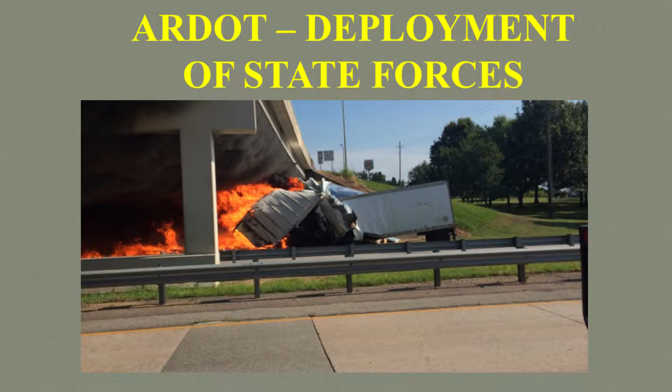Andy's going to be talking about how we use our maintenance forces in Arkansas. This is our deployment of state forces. I thought I'd start with some exciting slides. We got this bridge back open and everything done in 14 days.

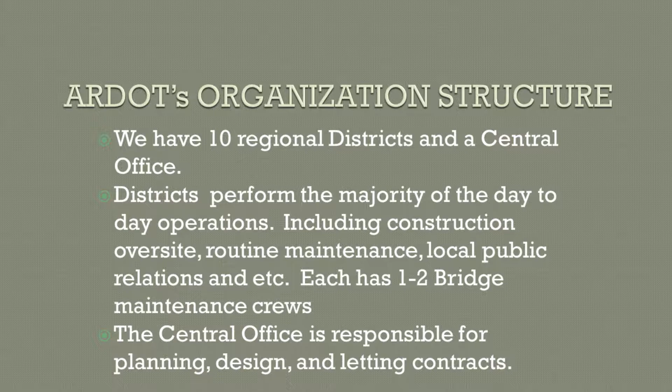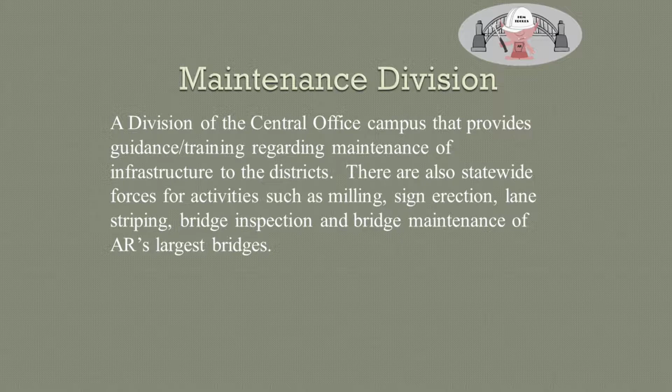I'm Andy Nanneman, a senior engineer with Heavy Bridge Maintenance. AR DOT is organized with 10 regional districts and a central office. The districts basically perform everyday maintenance and routine public relations, and the central office is responsible for planning, design, and letting of contracts. The maintenance division sets the precedence for what we need to do for maintenance as a state. Heavy Bridge Maintenance is a section of maintenance division.

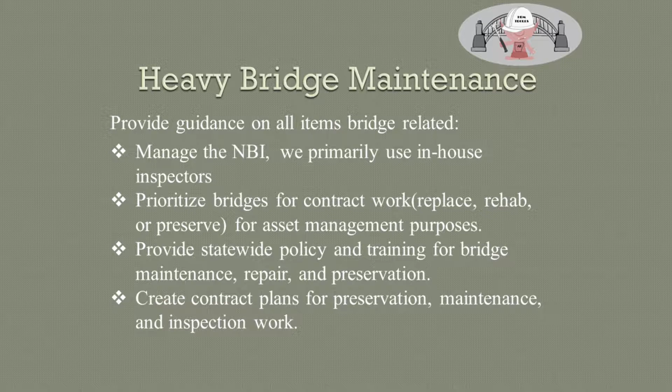We manage NBI primarily with in-house inspectors, and prioritize bridges for contract work, which Mike has a good presentation on Thursday. We provide statewide policy and training for bridge maintenance, repair, and preservation, and create contract plans for preservation, maintenance, and inspection work. We also have operational duties.

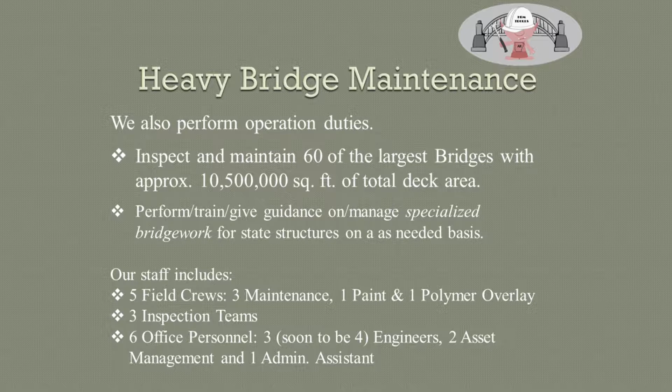We inspect and maintain 60 of the largest bridges in the state, approximately 10.5 million square feet of deck area. We perform and give guidance and manage specialized bridge work. Our staff includes 5 field crews, 3 of them general maintenance, 1 paint, and 1 polymer overlay, plus 3 inspection teams and 6 office personnel, including 3 engineers.

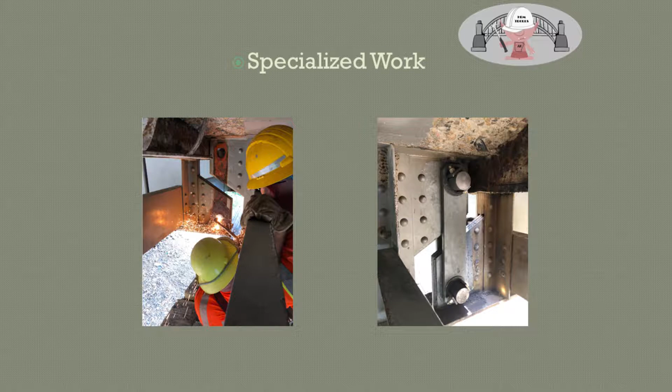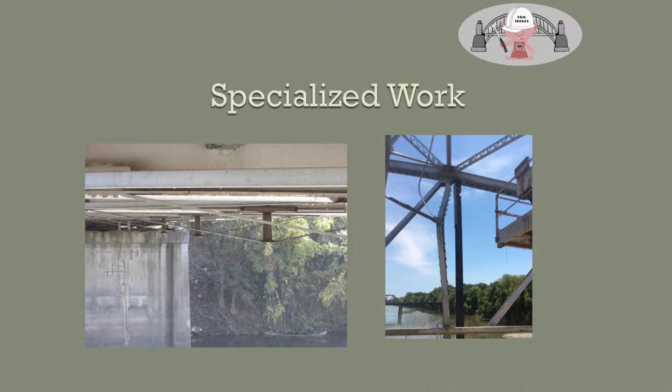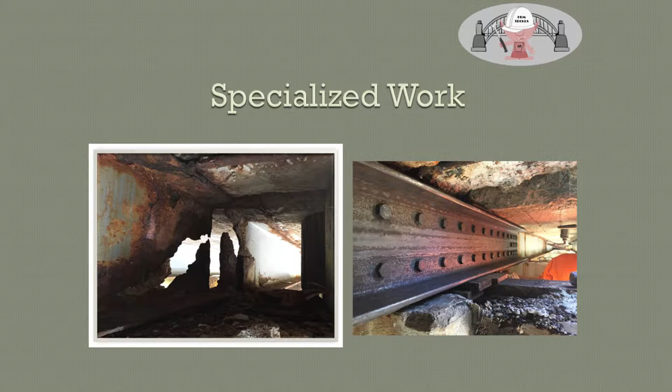Here's some of that specialized bridge work. We're replacing a pin and hanger. Here we added a king post to increase the load capacity of a bridge that was posted. On the right, we have a vertical member of a truss that was damaged by impact, which we replaced. And here's your typical corrosion at beam ends that we came back and fixed, making the bridge continuous.

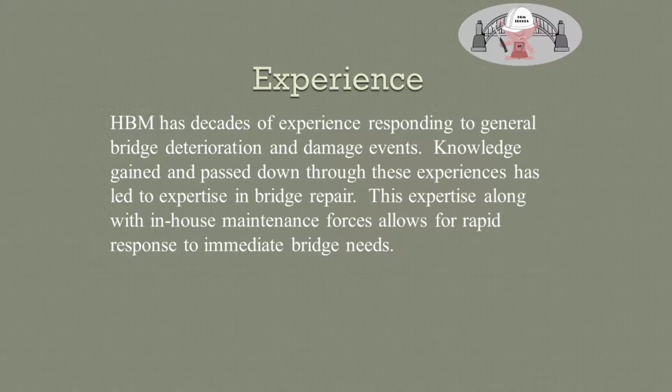Heavy Bridge has been doing this type of work for basically decades, passing that knowledge down. Because of that, we have a bit of expertise, and coupled with our maintenance crews and in-house forces, we can respond rapidly to immediate bridge needs.

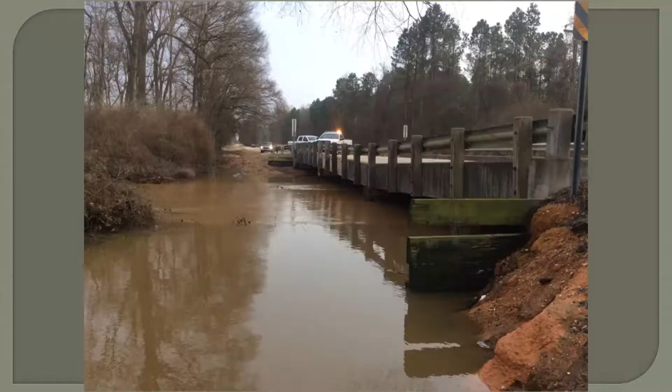Now I'm going to talk about a couple bridges that had immediate needs while I've been here in Heavy Bridge Maintenance. This one you can probably see there's a little bit of a dip, kind of a similar situation to Graham. We had an inspection report indicating decay in piles, and it was not caught until they failed.

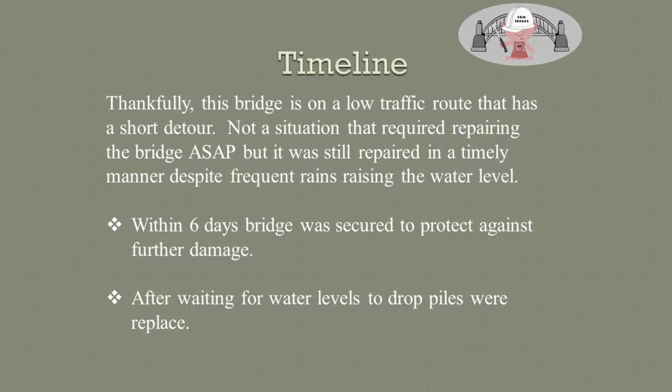This bridge might have come closer to collapsing than that one. As for timeline, thankfully this bridge is not a high traffic route, so we didn't have to rush to get it done for traffic, but we still didn't want it to collapse all the way. So we moved quick, and within 6 days we were able to secure it against further collapse. After water levels dropped, we were able to replace the piles or splice them.

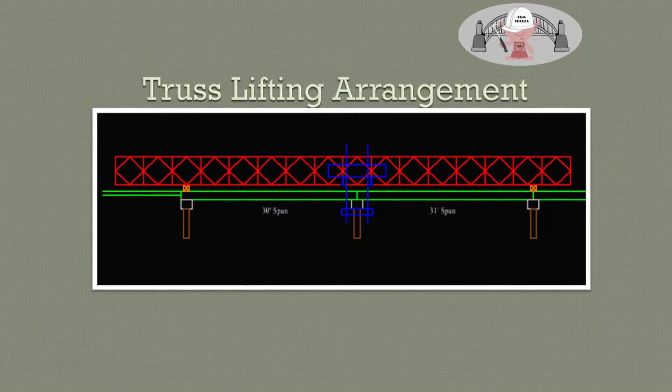Here's how we did it. We have Bailey units, basically 10-foot panels you can use to make trusses out of. So we did 2 double trusses down the bridge, and then had a hanger beam that we went down and picked the cap up with, using all-thread through the deck on top of that framework where we had our jacking platform.

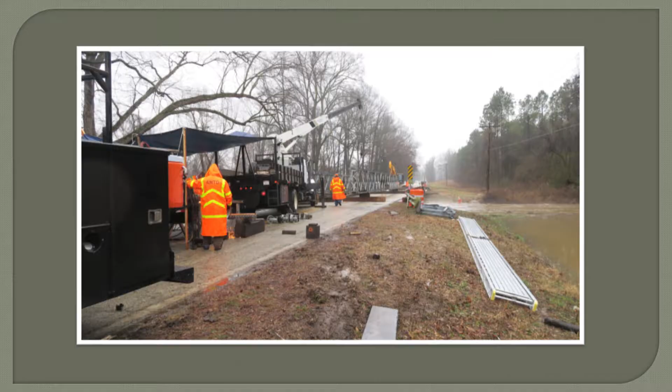Here you can see where we're erecting the trusses. We got these caster wheels from the federal surplus store so we could shove them across the bridge without it digging in. Here they are getting into place. We're lining up the all-thread with the holes through the deck so we can go down and catch the cap.

This picture gives you a feel for how much sag there is in that bridge. Those units are basically shoved up against each other. And all this was happening while we had heavy rains.

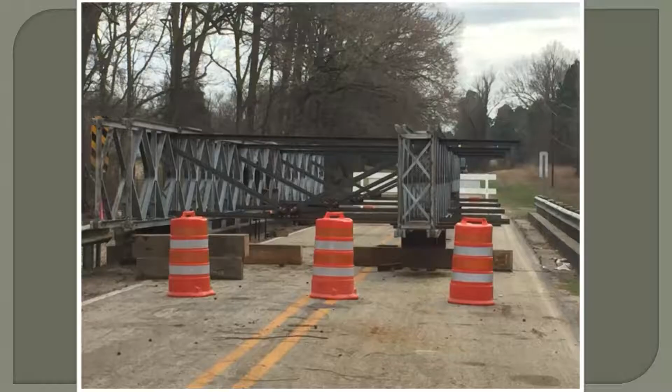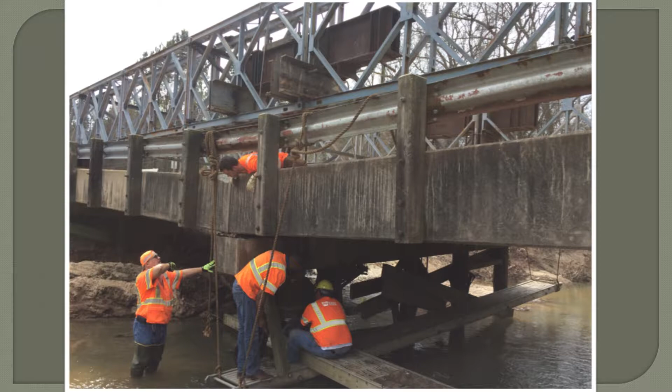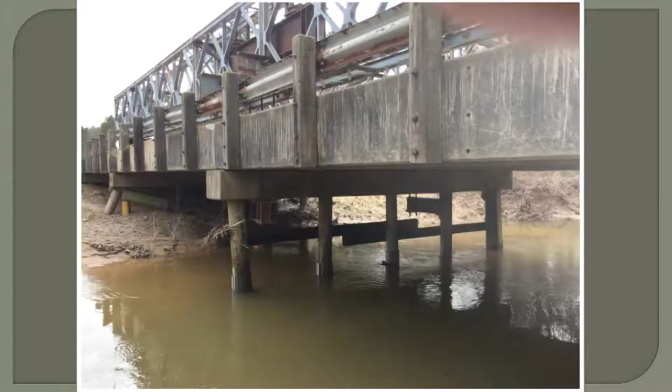There you can see the jacks. We got the all-thread running up, you got the jack sitting on top of the beam, push it up, and then run the nuts down and do it again until we brought it all up to level. There you can see the replaced piles, and then once the water went down further, we were able to get in and put a concrete collar on them.

A bridge strike. Obviously, with just keeping up with bridge deterioration, we all have good job security, but on occasion there's also impact damage.

This happened in Jonesboro, I want to say June 27th, right before 4th of July. Kind of an urban area, I-555 through by Jonesboro. So we had a lot of traffic, and we got a lot of requests to get it open as soon as possible.

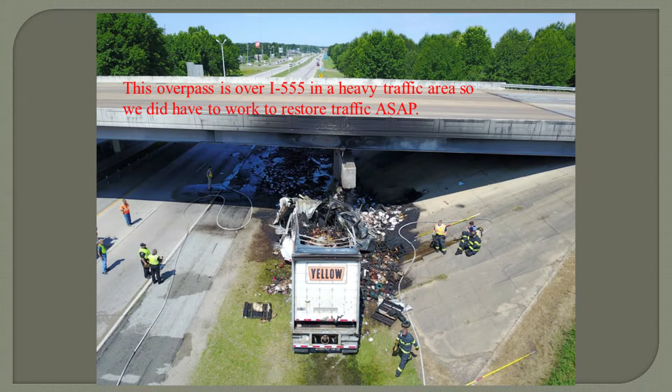Day one, accident occurred about 10 a.m. HBM engineers made it there by early afternoon, and our maintenance crew, they had to mobilize from across the state. They got there by approximately 5:30.

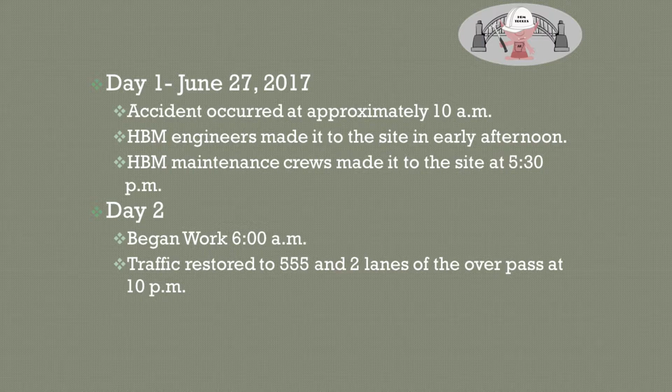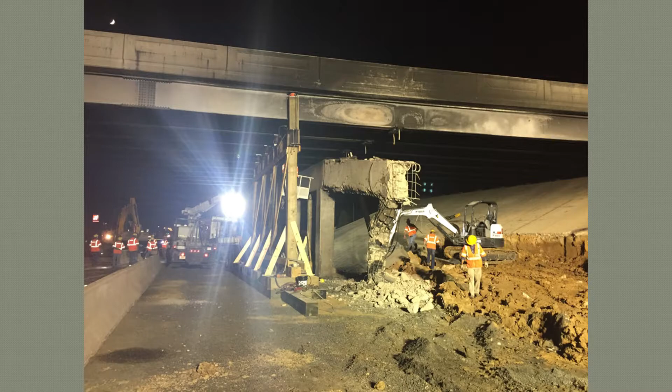Day two, we started work at 6 and restored traffic to 555 and 2 lanes of overpass by 10 p.m. There you can see we got putting in a false bent, 4 columns with a steel cap. And there we are by 10 p.m., setting up barrier so we can open up traffic while you got the Bobcat over on the side already getting rid of concrete.

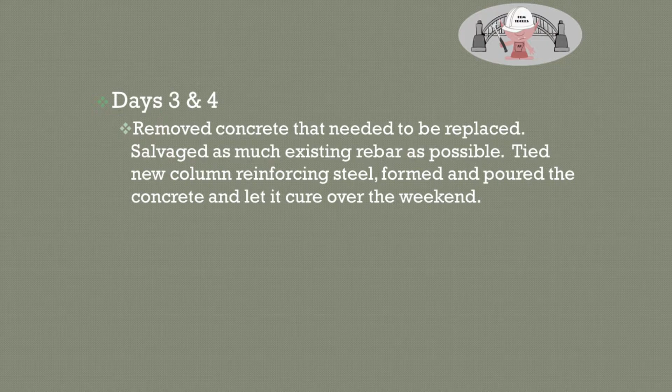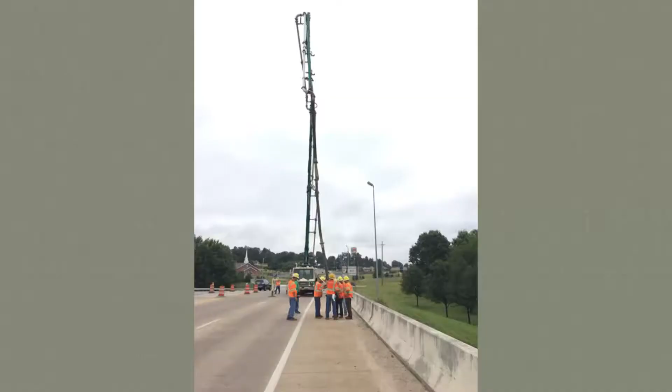Got the pump truck on top, hole through the deck to pour the column. There's our form work, the guys there ready for the pour. Then days 7 through 11, we formed the cap, tied the rebar, and poured the cap. Then waited, cured a couple days, and we broke cylinders, had the capacity we needed, and we restored traffic.

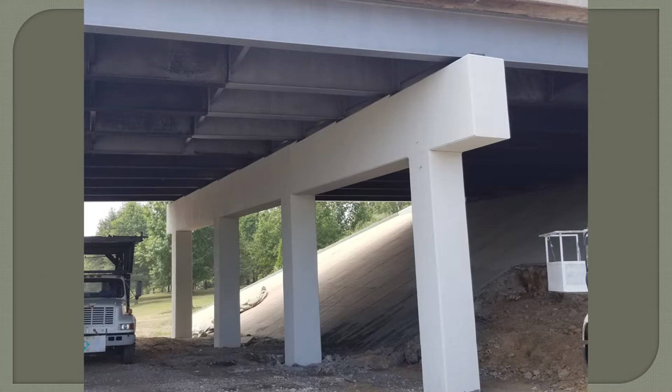I blew through that pretty fast, so if you got any questions about those repairs.

Andy, it sounds like you guys have a wealth of knowledge there. Do you guys have a database, or how are you storing this knowledge and passing it down? How are you keeping track of this stuff, or have you thought about that, or what's the plan there? We probably do need to get a little more organized as far as digital goes, but right now Mike's got a pretty good file system going where he remembers things he's seen and can pull the job out, and we rely a lot on Mike right now.

For the crushing piles and the temporary truss, were there any fail-safes that were possible instead of just the threaded rods? I know it's limited underneath as to how you could support the structure other than just overhead with the threaded rods. Was there anything that you guys had to protect the workers underneath other than just supporting from above? No, what we did on that, we did reinforce the end bent and the intermediate bent where more load was going, but the guys underneath, we did not have any more support.

I'm just curious, how did you get to that point with that bridge? Were there no signs in the previous inspection reports of the failing piles? There was decay mentioned, and I think it was probably an overload that went over piles that were already rotted up from decay, and before district forces could get out there and replace them or fix them, an overload went over and caused the failure. Because it was immediate, it wasn't like there was sag or failure. It was just signs of decay, and then the bridge was closed.